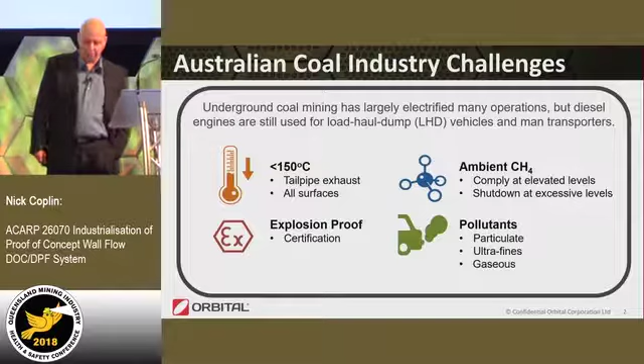You guys have a lot of challenges when developing product for underground mining. It's a fairly dangerous environment. You've got to have surface temperatures below the ignition point of coal, and product that has to be certified explosion proof. You're dealing with environments that have methane, ethylene, and other combustible byproducts. Of course, you're after the protection of your workers, so you're looking at technology that can control particulate emissions, ultrafines, as well as gaseous compounds.

Today's presentation, I'd like to review some key findings of the ACARP work we've been doing, two projects to date, and I'll leap from the first project to the second. I'd like to share some of the particulate and emission results and some of the challenges we've had. Today, the solution of choice is to use wet filters as a means of collecting particles out of the exhaust and preventing them from entering the enclosed environment of the underground space.

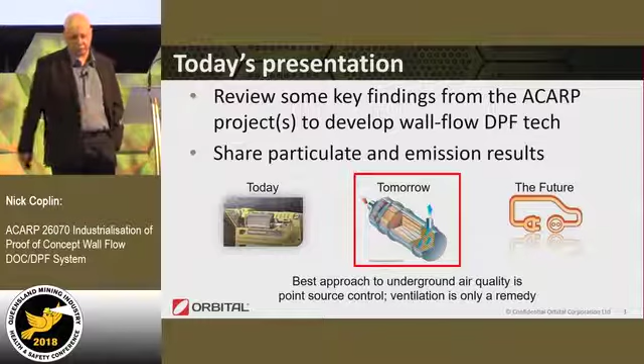The future will be disruptive. It will probably be electrically powered machines, just like electrically powered machines have been implemented in your longwall processes. But for now, the diesel engine is with us as a mobile transport solution, and we need to solve the emissions of that engine at the point source. Ventilation is a remedy, it is not the solution.

A little bit about ACARP, which has sponsored this project. Many of you will know ACARP, you are members by virtue of being miners. Some of your product proceeds actually go back into the bucket that is dished out to companies for research and development. Our first project was a fundamental research project.

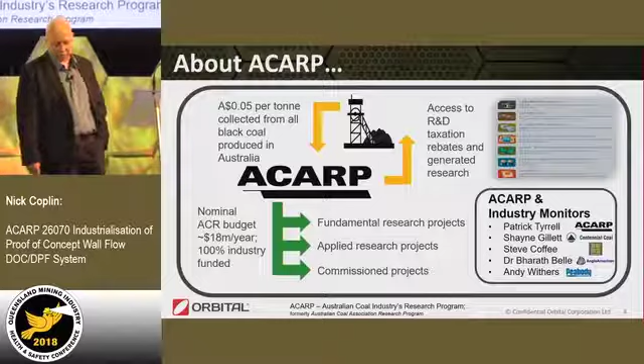It looked at the proof of concept level. Our second project is applied, so we're actually looking at the industrialisation of that solution. I mentioned our industry monitors who have walked us on this journey, with great support from many mining companies. Without them, without that collaboration, we wouldn't have been able to apply some of these technologies to the mining environment.

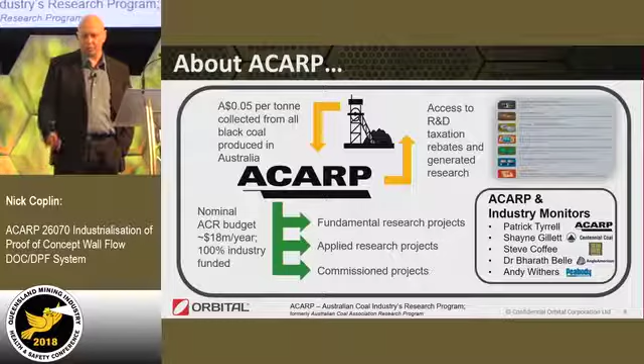So what was the plan? Plan number one was to establish ways of improving worker health and ensuring there were good solutions for maintaining air quality, robust tamper-free solutions where we could reduce particulates at the source and ensure there were no excursions in the levels we were attaining.

The approach taken was to have a sealed wall flow DPF technology and work hard to match the way that technology performed with the duty cycle of those machines. There's no point having technology that tells you to run a machine a different way, it had to work with the machines as they run.

These machines generally, as you'll see from some of the data we'll present, run a fairly low duty cycle, with long periods of idle, and that doesn't help a lot of technology work.

The other thing we were doing in the background was identifying ways of reducing the total cost of operation. At the moment, the solution of replacing filters on a shift by shift basis, or sometimes more often, is economically challenging. There are environmental issues as well as disposal and things like that. But the biggest risk is people forget to put these filters in, or people take a shortcut, and because it's not tamper-proof, you can't guarantee the outcome.

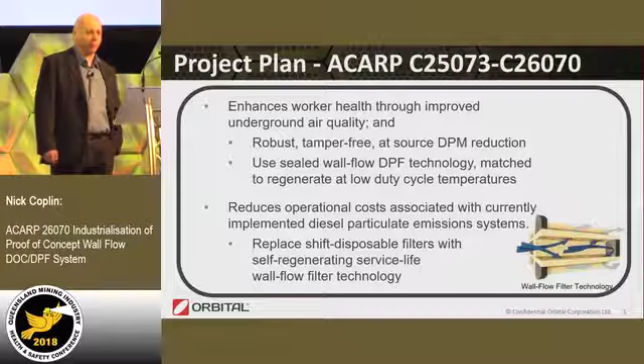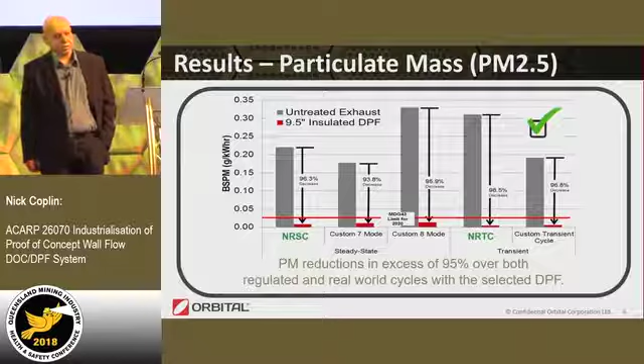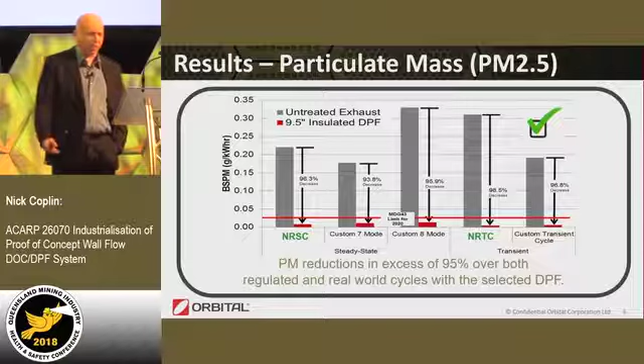The graphs with the green labels, NRTC and NRSC, are the regulatory standards. But what we did as part of the project is look at how the machines are being used, then test in an engine dyno environment how the diesel particulate filter worked using the duty cycle of the machine working in the real world. You can see the same sort of benefits being achieved or exceeded.

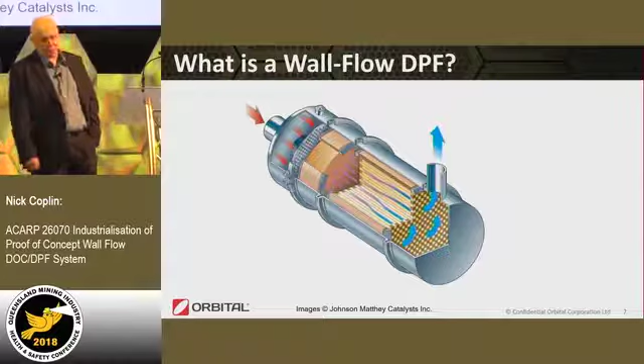So what is a wall flow diesel particulate filter? I'll take a couple of slides to explain the technology for those not familiar with it. It consists of two parts. Firstly, there is a catalyst, which is a flow-through honeycomb of ceramic with a wash coat of precious metal, platinum, palladium, something like that.

The diesel particulate filter itself has the same structure, a honeycomb, but every alternate hole is blocked from one end or the other. This means the gas has to go through the wall to get out the other side, hence its name, wall flow. It flows through the wall rather than through the holes.

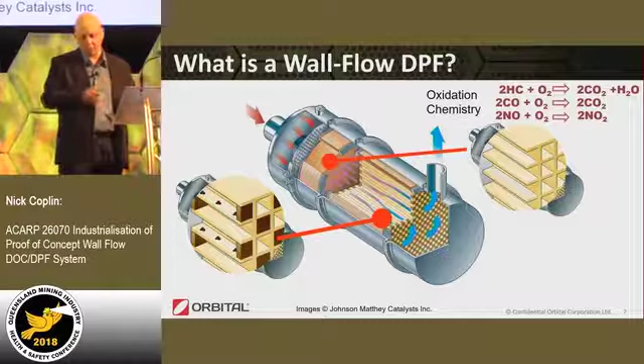I'll have a slide on chemistry since this is a technical event, but I won't go too deep. Once you store soot on a diesel particulate filter, how do you get that carbon out? There's no point having a sponge if it blocks up, so you have to regenerate it. This is where technology called CCRT, continuously catalytic regeneration technology, comes into its own.

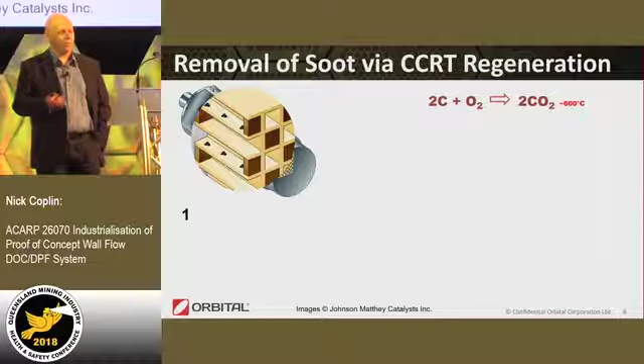The first level of regeneration is pure oxidation. You have carbon, it finds some oxygen. At the right temperature, around 600 degrees Celsius, it burns off and the carbon comes out as CO2. But a diesel engine doesn't reach those gas temperatures very often. It does at full load, but we know machines aren't used that often at full load.

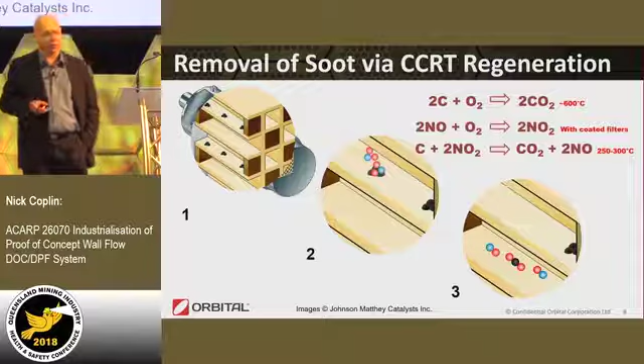So we need an enabler, a little assistant, which comes through using NO, nitric oxide, as a carrier for additional oxygen. In combination with the NO2 that's formed and its reaction with carbon, we're able to get that oxygen to jump across much easier, and do so at lower temperatures, around 250 to 300 degrees Celsius, which is typically the operating temperature of exhaust coming from a diesel engine.

So how do we fit that system in? This is your typical disposable filter system. There's a water scrubber that cools the exhaust, and then that wet exhaust goes through a filter, typically a paper element, sometimes glass fibre, which catches the particles. In the reconstructed system, that water scrubber is still there so you can meet your tailpipe temperature requirement, bringing it below 70 degrees, and the diesel particulate filter is installed upstream of that, straight out of the engine, to get as hot a gas as possible going into it.

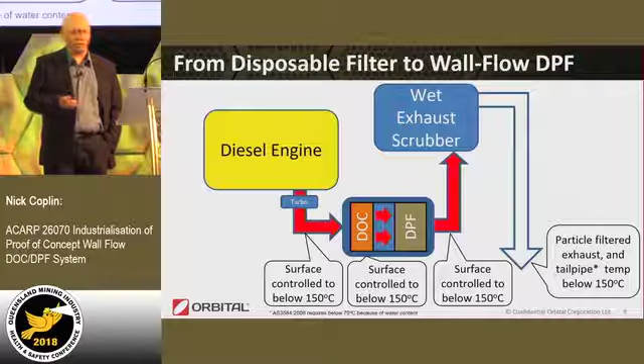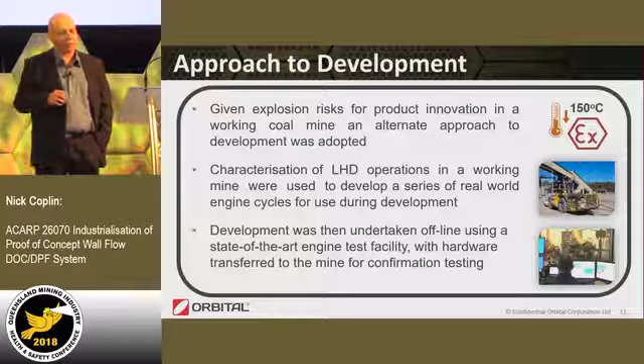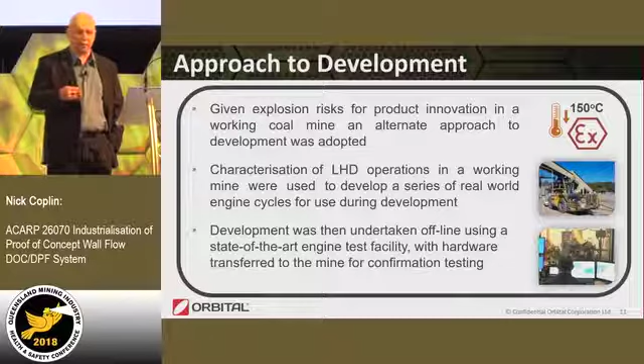We're dealing with chemistry that requires temperature, so developing that in a mine environment isn't necessarily smart, and it's also quite dangerous and an iterative process. So rather than develop in a mine and burden the business with the cost of development, we took the process offline. We measured how the machines worked in the field, took that data and created cycles to represent it, then ran that in a dyno environment. This let us iterate through the development process effectively without any of the dangers, and then occasionally go back to mine to re-qualify that those solutions were heading in the right direction.

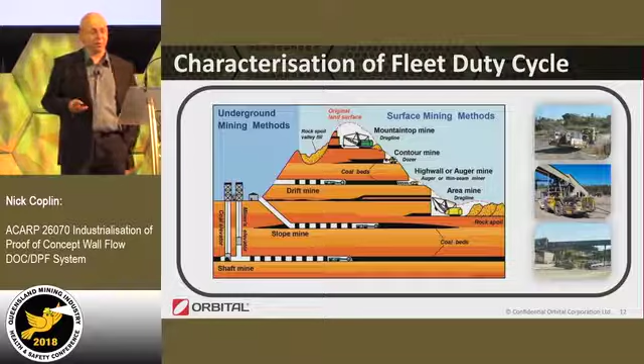The first step was to characterize the duty cycle of the fleet. There are different mining operations - you guys are mining people, I don't need to explain those - but in some applications the machines get worked harder, in others they're quite lazy. The cycle we developed to represent how an LHD works involved two cycles: steady state and transient. It's really the transient one that governs the performance of any system, because that's how it works in the real world. It doesn't sit at one speed and one load all day; it jumps between these things and the temperatures move around.

The takeaway from this data, published in our first ACARP project, is that about 50 to 57% of the time on an LHD is spent idling. When you idle an engine, that's low temperature exhaust, which isn't conducive to regeneration. So you have to do some special things there to make it happen.

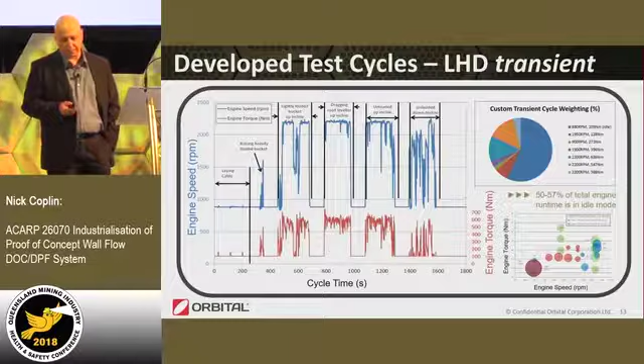The second challenge is demonstrating that you can have this hot thing inside, where the temperatures are being used to make the catalyst reaction work, but yet you can maintain a cool surface temperature. The graph here shows some preliminary results where we had hot exhaust, in some cases up to 600-700 degrees gas temperature, but on the surface we were able to be compliant through an insulation layer around that DPF.

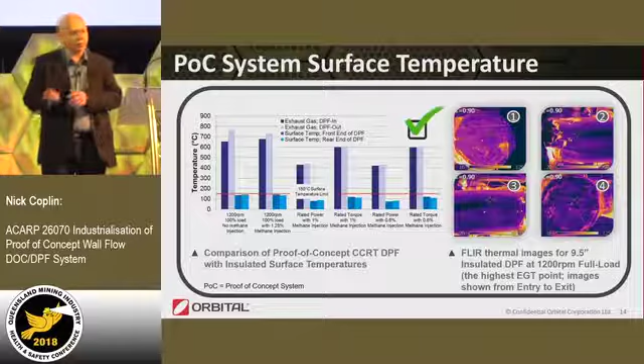Insulation is not a brilliant, novel way, nothing truly inventive about that, but it did two things for us. Firstly, it kept the heat in, so when we didn't have a lot of heat, like at idle, we amplified that heat. Secondly, it reduced the burden of the cooling that would normally be taken on by the radiator of the application. So when you wrap an exhaust in water, you're wasting all that heat and putting the burden onto the machine.

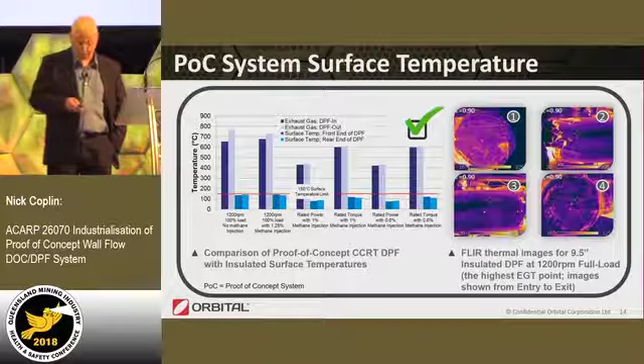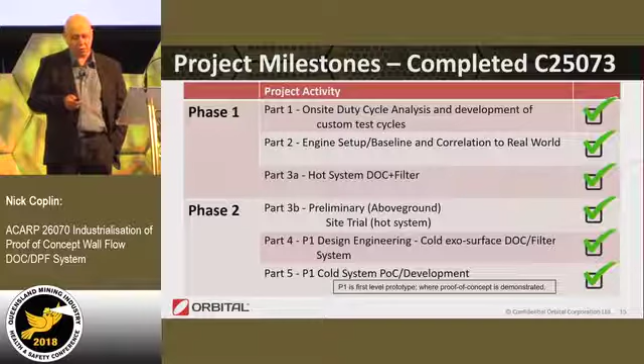So the first project, the 25073, was completed in 2016. The results have now been published and are available from the ACARP website. That project ran fairly smoothly and straightforward.

It led to the second project, where we were looking to industrialise that system. We had a great proof of concept approach, we'd done one site trial just to measure and compare some numbers. The second project was really about: can you actually build this? Can you build it in quantity? Can you make it safe enough to be compliant and achieve the necessary certification?

We're in the final stages of that. There's still one significant site trial to do, and then some pre-certification work needs to be polished up. We've done the basics and are confident that it is working, so we expect to complete this project by the end of the year.

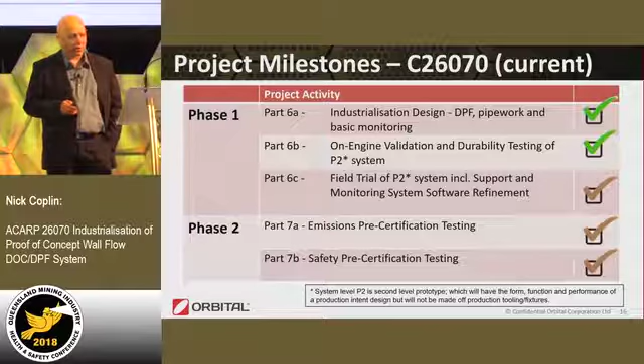The first question that gets asked is, will this filter block up? That's a good question to ask. It is a ceramic, it's porous, it will collect the black stuff. If we aren't operating that in the appropriate way, it will build up back pressure, and that's not a good thing.

The data in this graph is from a 100-hour cycle that we've done, and it'll become apparent why only a 100-hour test demonstrates this: when we get to 50 hours of operation in terms of back pressure build-up, it's the same at 100 hours. So it reaches a stabilisation condition where the system is able to store and regenerate and run for an extended period of time. That back pressure increase is not significant, it's of the order of 4 kPa, and typically in a whole exhaust system there's about 30 kPa.

So it's not a big increase, and it's detectable. From a control system point of view, you're able to detect that change and know that you're toggling between clean and not clean. So stability is demonstrated.

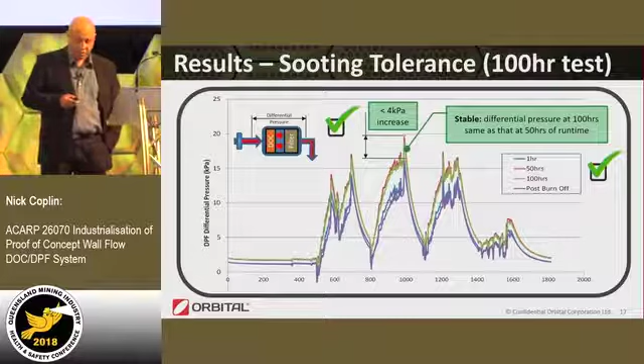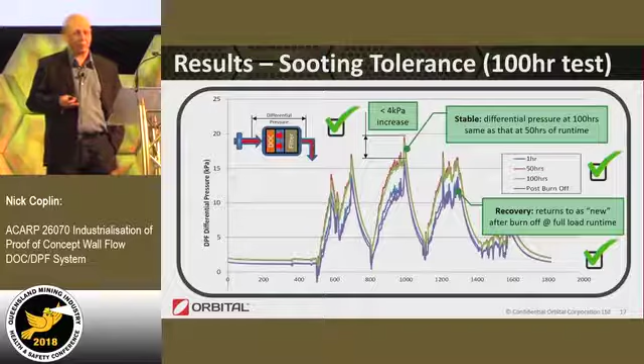The other thing we've demonstrated is if you do get the opportunity to run high load, for example if you're climbing out of the drift, then you will burn off what has been stored and stabilised. So you will get back to baseline zero with a bit of hot temperature work. The cycle we used here was the ACARP-developed transient cycle, looking at the real industry cycle, not some synthetic artificial cycle in the way the machine was operating.

We use water cooling at joints, because wherever you have a joint you will have metal to metal, and one side of that joint needs some cooling to draw away the heat. But the insulation works quite effectively on all other surfaces, so any extended surface we're able to wrap in a blanket and keep the heat in, which is good for the catalytic processes.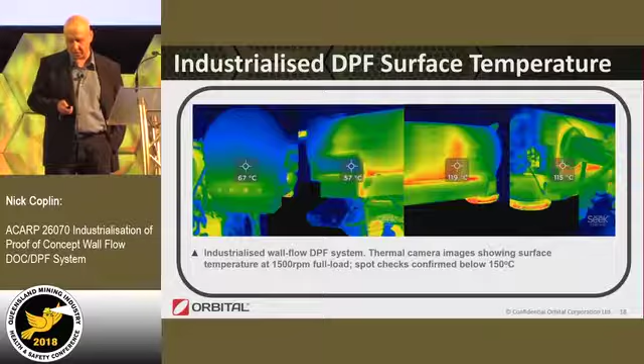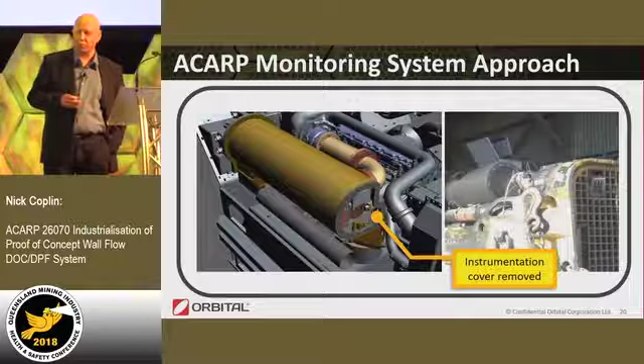There's the system again, and the CAD drawing there showing what's inside the instrumentation panel. Once you remove the cover, there's a bunch of instruments there that pay attention to what the DPF is doing and make sure it's all working appropriately.

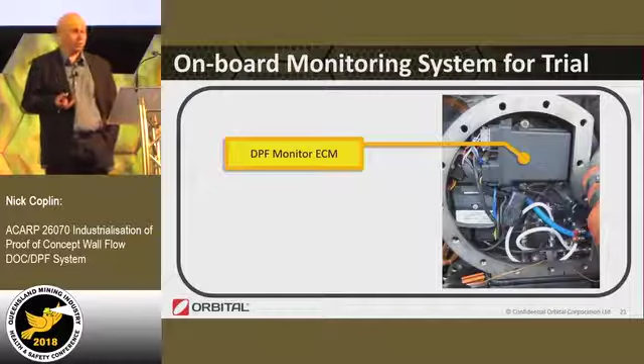The core of that instrumentation system, or the onboard monitoring, is a little computer that basically monitors a number of functions. It monitors pre-diesel particulate filter conditions, temperature and pressure, and post-diesel particulate filter conditions, again, temperature and pressure.

And these are the basics. They're the minimum things to determine the differential pressure across that device. Is it building up some back pressure? Has the gas going into it been of the right condition and temperature, and am I running in a condition that's going to be unfavourable?

And the post-temperature there is to make sure that we're not having any thermal runaway or any adverse conditions where we're chewing up too much stored carbon and all of a sudden we're having hotter gas temperature than we expected.

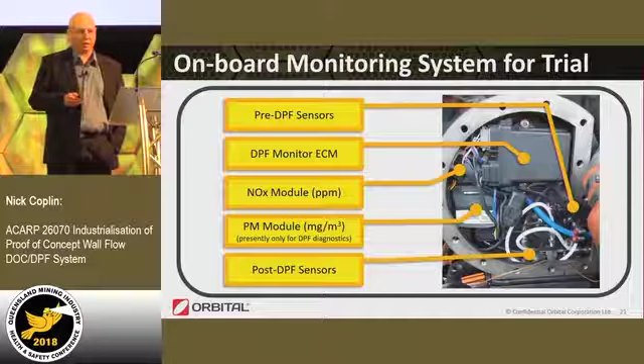The real insight into what goes forward and what may be technology that gets adopted is real-time monitoring of NOx emissions and real-time monitoring of particulate emissions. In various jurisdictions you have to monitor these on a monthly, weekly or 3-monthly basis, but if you can do it at source and know that there is or isn't a problem as you drive the machine, then you don't have to wait for an answer after it's been too late to do anything about it.

To demonstrate where that technology is at, it is available on on-road applications. So you buy a truck now, it'll have a NOx sensor. Passenger cars have had NOx sensors for the last 10 years. Particulate sensors have been out for a couple of years in the on-road environment. There is no convergence in what that technology is. We have picked one particular technology, what we believe to be the simplest and the most robust.

In terms of NOx measurements, driving around the Newstan mine, this swarm of bees essentially shows you different readings at different times, and you might say, well, I can't understand anything of that. There's a lot of information there. How do I know if it's meaningful or not meaningful?

When you apply a filter for it, the filter basically is to determine, okay, I've been at steady state for a few seconds, I can trust that number, I'm not jumping in between points, and then you map it across to the red points there, which is data from the dyno, you can see reasonably good correlation. So a bit of a filter algorithm on the real-time data can actually give you a great predictor of what your NOx tailpipe number is as the machine runs.

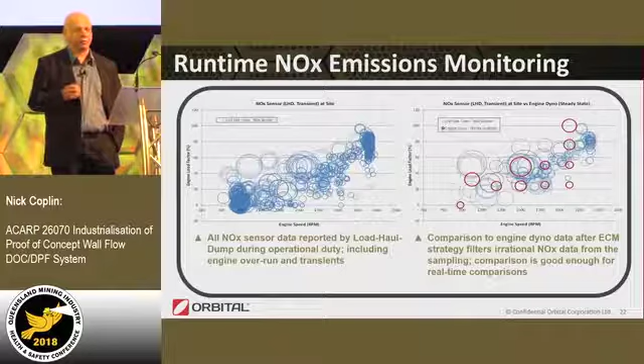If that number moves from baseline, you know you need to do something.

The other sensor we had on site was the particulate monitoring system, and that's a resistive element type. So as it carbons up, its resistance drops because its conductivity improves. Fairly simple technology. It then regenerates itself, so it starts again clean without the conductivity and measures itself again. It's more a go, no-go gauge.

It's telling you if the particulate filter has failed for any particular reason, rather than telling you if the number has moved by 5% or 6%. So it's really a scale of change rather than a resolution of change.

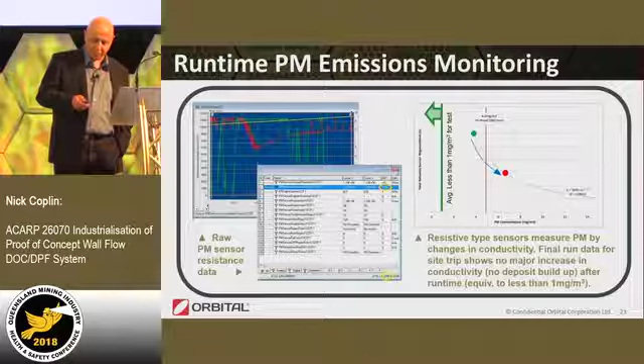If everything's compliant, essentially you're operating under the 1 milligram per cubic metre basis. If you see an excursion, for example, you may have had damage to the system, maybe it's cracked, maybe it's had thermal runaway and it's now porous, then you'll see a huge increase in particulates and the sensor's able to pick that. During the trial, there was no incident or excursions beyond the 1 milligram per cubic metre.

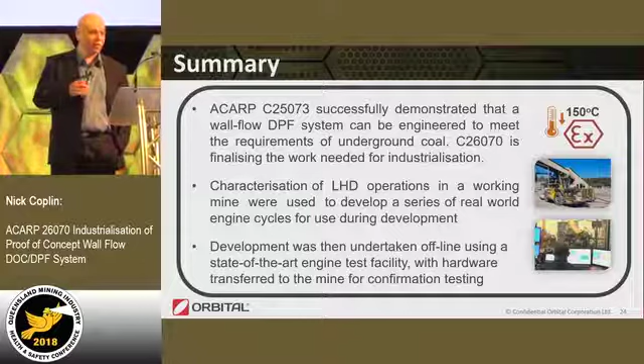So in summary, the project has been quite a successful demonstration of collaboration, collaborating with industry and collaborating with ACARP to bring good minds together into the one project to see, okay, this is new technology, can we apply it to a new playground? The first project demonstrated without a doubt that the proof of concept capability was there. The second project has presented some challenges in how do we industrialise that and how do we commercialise it, obviously ultimately to build it to a price that the industry can afford, and there's a good payback over the other solutions that are currently being implemented, with the potential for adopting further things such as runtime emission monitoring.

One of the walkaways from this is the drive cycles used to characterise machines, and these apply not just to this particular project but to the development of any engine technology. That methodology of understanding your machine, developing a solution for it, and going to work with the sites to make sure it proves itself out, is a handy tool to remember.

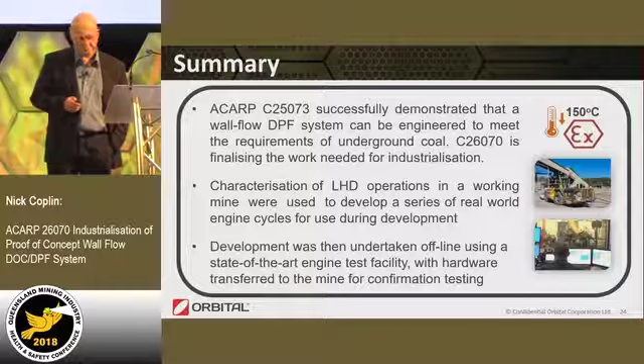I believe the collaboration has probably been the best experience for us. So I'd like to thank ACARP and the industry for sponsoring the program. I believe they're up for renewal for the next five-year tenure, so I would encourage that. Thank you very much.

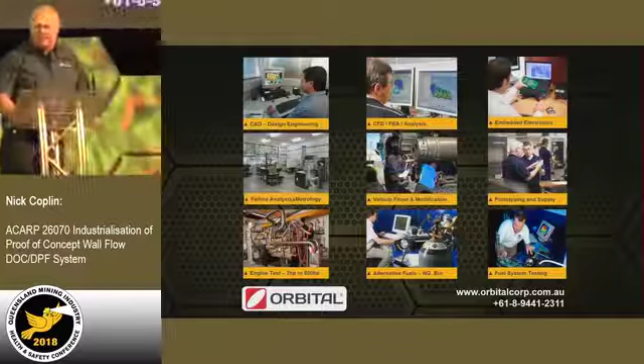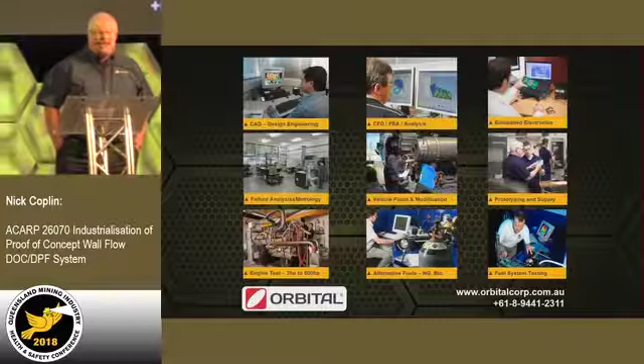Where's the fitters in the room, everybody? Morning, Nick. Tom, I'm the GM at Grasstree.

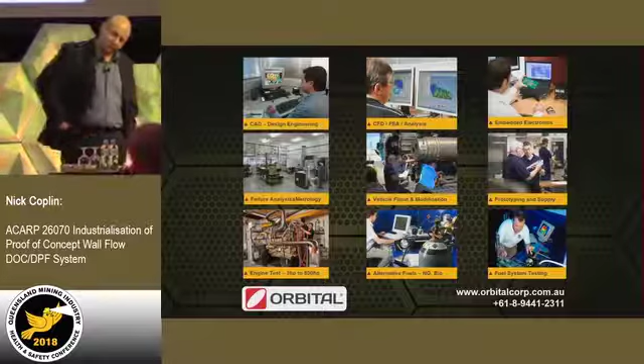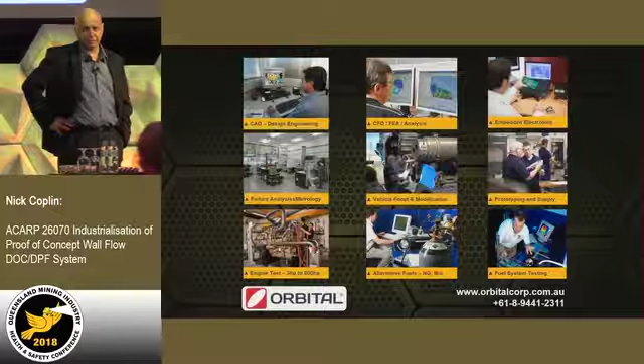Just a question about serviceability. So you mentioned that you wrap this thing in a thermal blanket to keep the temperatures higher. What does that mean when you take it back to the workshop? Do you have to have a longer cool-down period before fitters can get back in there to change it out, or will there be time imposts on that side of it?

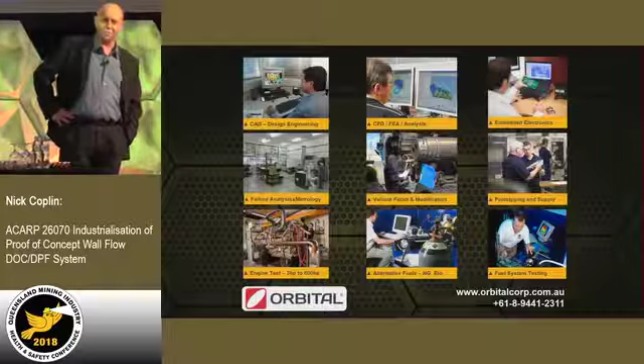Yeah, look, it's a good question, and certainly the insulation does keep the inners warm. It could take three or four hours for this thing to cool down. The intent is it's tamper-proof and not designed to be regularly serviced, and that's part of the industrialisation project. We're aiming for a Code D change-out, so aiming for a 2,000 hour service life as opposed to once every 8 hours or once a week or once a month.

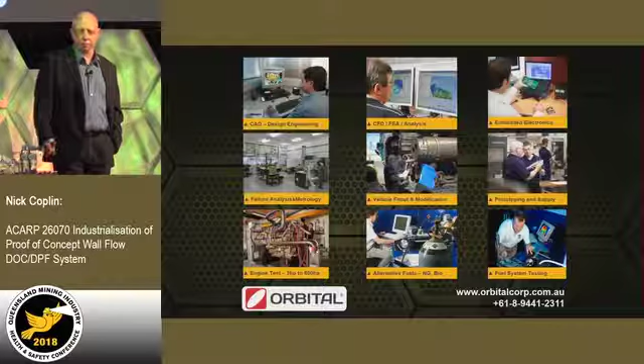That is a nice milestone to set. The core technology inside our diesel particulate filter on road achieves about a 4,000 hour life, or 400,000 kilometres. The mining environment's a little bit tougher, the temperature conditions are a little bit tougher, vibration and other things have to be considered. Fuel and oil selection are key requirements, so it's beneficial to use low sulphur fuels.

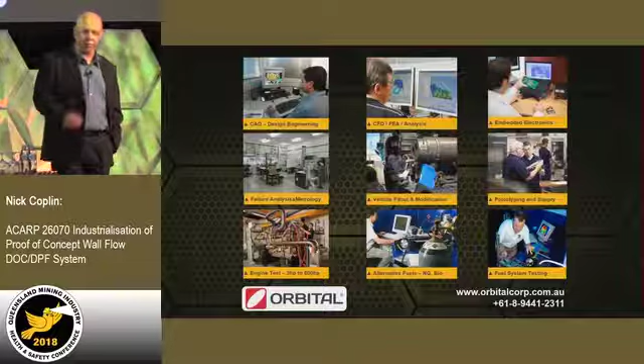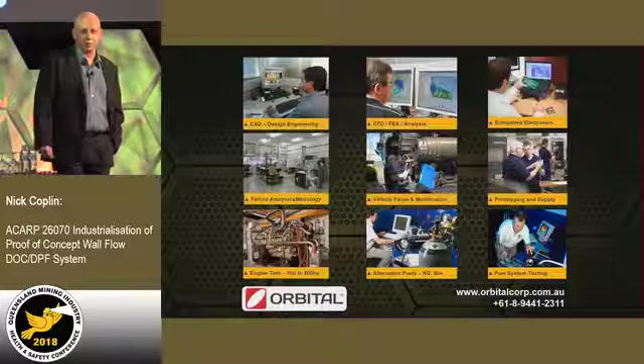Morning, Nick. My name's Nick Scully. I'm with the DNRME.

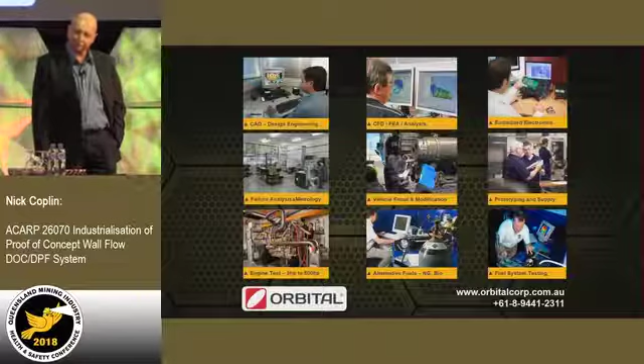You mentioned a little about commercialisation, and that there was a bit more work to be done there. What encouragement is needed to get the commercialisation kicked along?

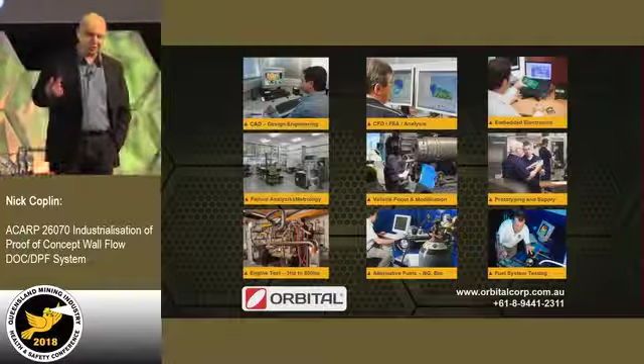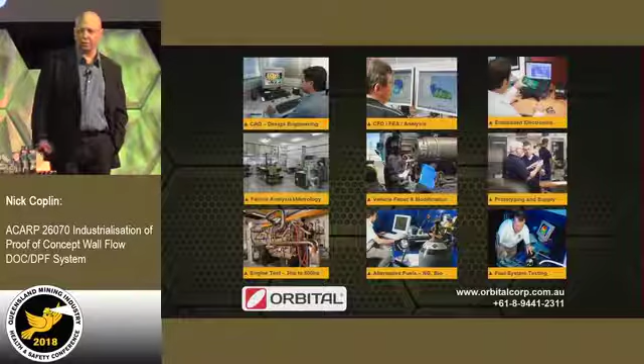Yeah, good question. Having worked in technology for 20-odd years, that is the hardest step sometimes. You've got to have a brave first mover, and some of the companies working with the project, Centennial and South32 for example, are keen to have their OEMs adopt that technology. One of the OEMs has already been part of this journey - PPK Group, who make the coal tram, predominantly sold in New South Wales from what I understand, have been a sponsor in kind in terms of engine technology. So they've been part of the journey and perhaps understand that's the next step they need to take, both as a solution provider to their industry and as competitive technology to others.

Sandvik, who are the custodians, I guess, of the old Eimco machines, are joining the program for this final stage of 26070 as we look to demonstrate that what we've developed thus far applies to them as well.

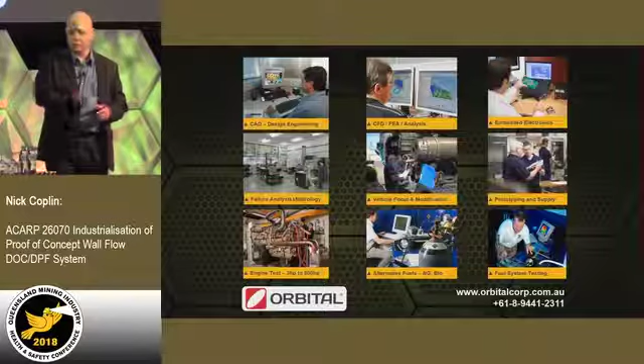That commercialisation step, from my experience, comes from having the OEMs on board. Orbital as a company is able to make the diesel particulate filter, but we're not necessarily able to tell people you must fit it. That comes voluntarily from OEMs and miners saying, yeah, I think this is the technology, I think it's disruptive enough, and I think it's at the right price that the payback is there to do so. Thank you, Nick.